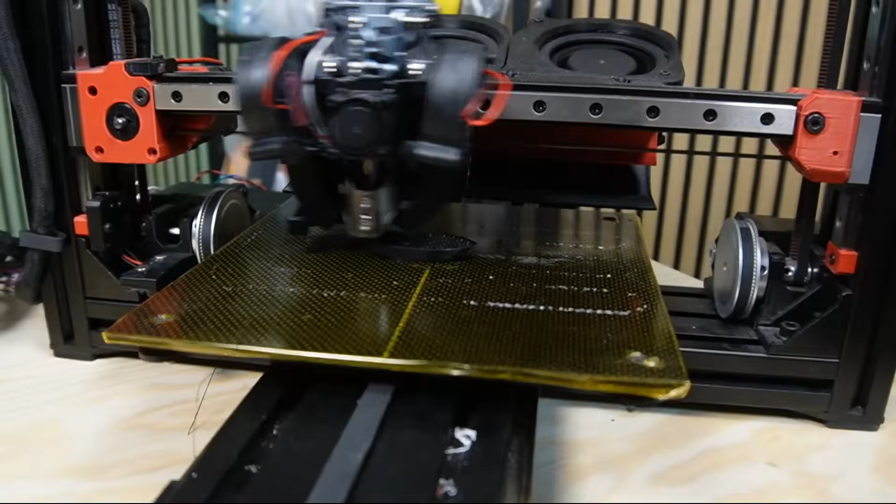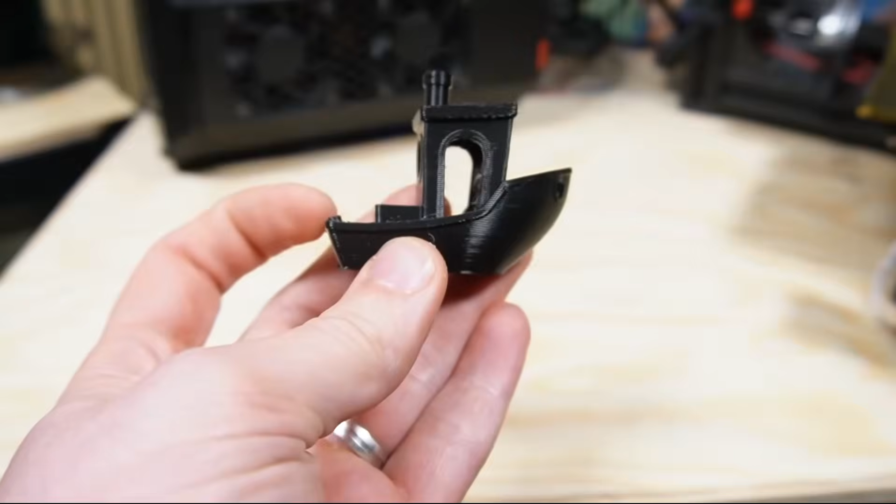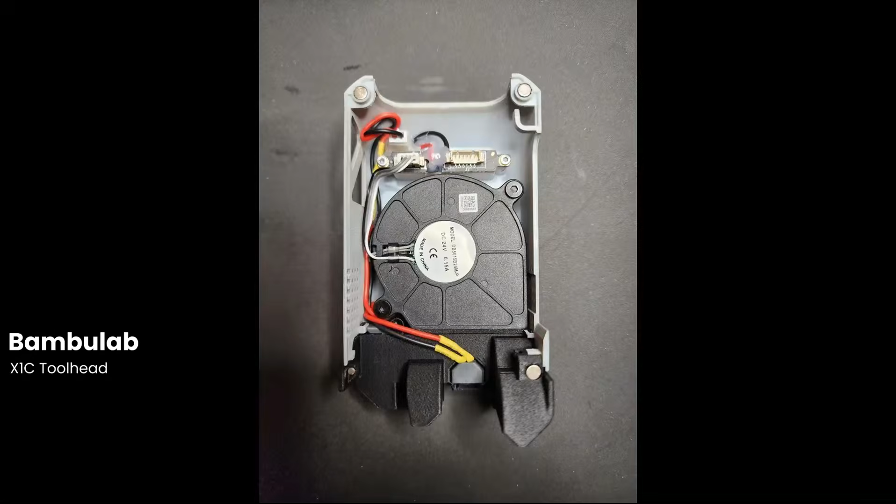A tiny component, just a few centimeters wide. At first glance, it looks completely unremarkable, and yet it decides whether your print succeeds or ends up as a useless blob of plastic. It sounds mundane. It's not.

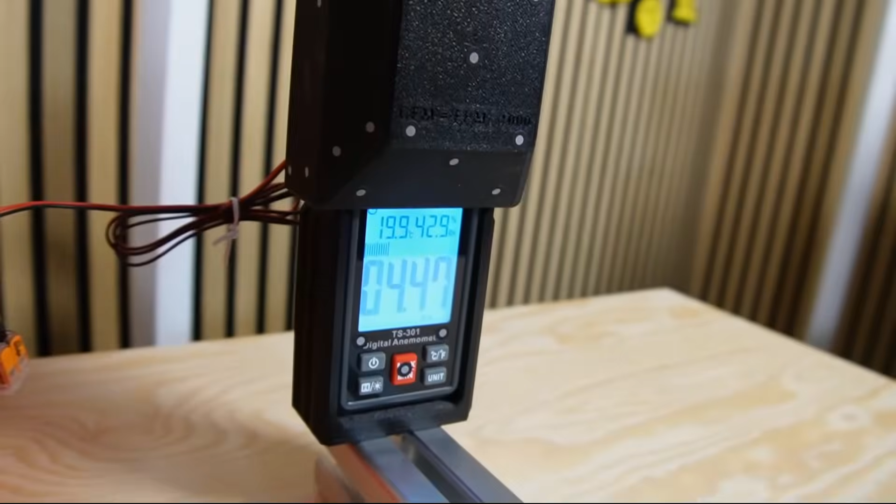We're talking about your part cooling, especially the 5015 radial fan. It's the part sitting on nearly every modern printhead, ensuring the layer you just laid down solidifies fast enough. Between the strongest and the weakest fan we have here on the table, there is a factor of 4 in performance. If we pick the wrong one, we will end up searching for the root of the problem everywhere in the printer except where it actually is.

That's why we ordered 16 5015 fans, built a test bench, and measured everything properly: air velocity, RPM, power consumption, and noise levels. Tested in a free channel and under realistic backpressure, just like a real printhead.

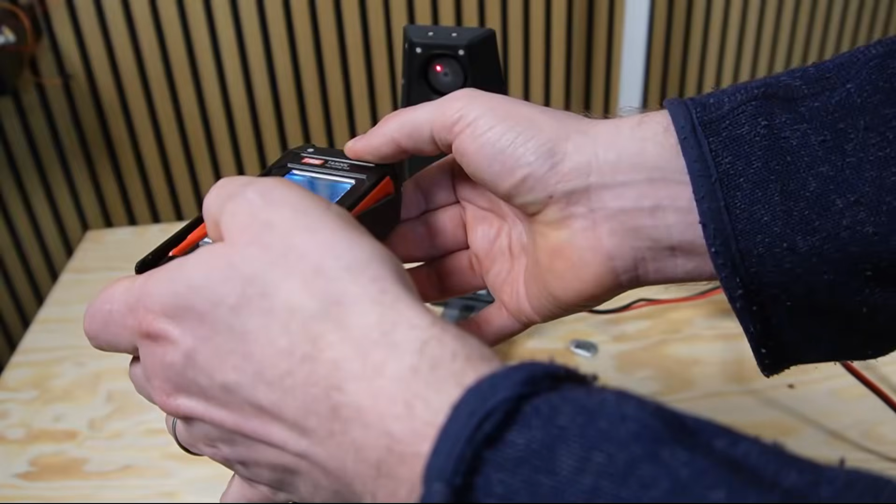Whether you're a speed printer trying to shave off seconds or you're just starting to dive into your printer's hardware, this test gives you data instead of gut feelings. And by the way, the biggest surprise wasn't the most expensive fan in the field, it was one we bought from China for under €5.

If you drop by the channel often, you know we have an LH Stinger. For those who aren't familiar, it's a DIY printer based on an Ender 3 but rigorously trimmed for speed. Carbon bed, stiff frame, dual Y motors. We introduced it in detail nearly 2 years ago. If you want to know more about the build, the link is in the video description.

Mechanically, the printer can handle more than 1000 millimeters per second with extreme acceleration. We aren't fully utilizing that yet because other factors limit us first. And exactly one of those factors is today's topic: the cooling.

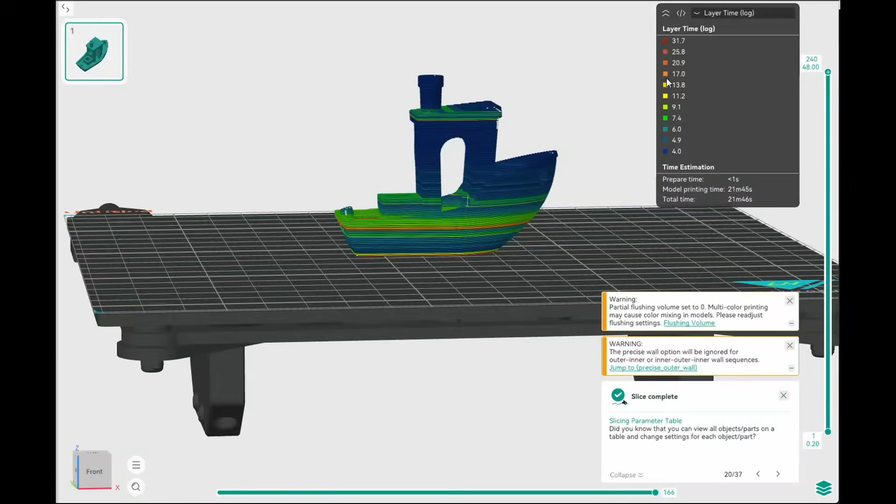The faster we print, the less time each layer has to cool down. The solution is obvious: more air on the part. And for years, the standard for that has been the 5015 radial fan. Theoretically, they are all the same dimensions, same mounting holes, but in practice they are worlds apart.

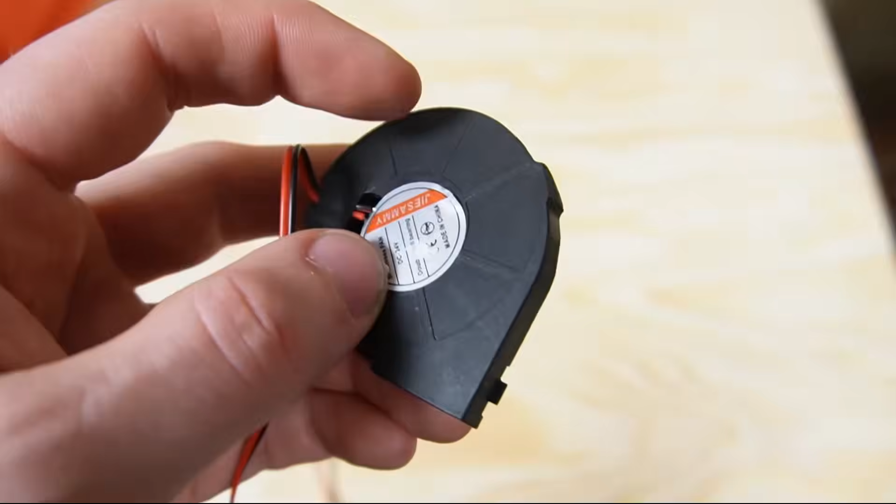We have models here that look identical on the outside, yet one blows 6 times as much air as the other. We finally wanted to measure which one is the best, but before we dive into the numbers, let's look at our candidates. We tried to get everything on the table that the community is currently using, from classics like the Sunon to RPM monsters like the Devil Design Typhoon or Honey Badger, all the way down to AliExpress finds we knew nothing about.

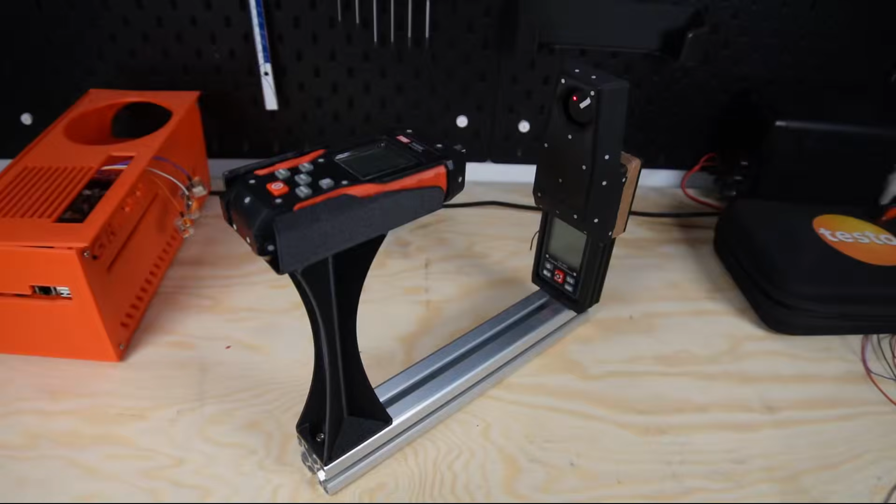One fan is running outside the competition, the Cartographer 3D Cyclone. It hits 22,000 RPM according to the datasheet, which we verified. Why isn't it in the ranking? First, it doesn't fit our test bench. Second, it has a metal fan wheel. If that thing flies out of the housing at 22,000 RPM, it's just too dangerous.

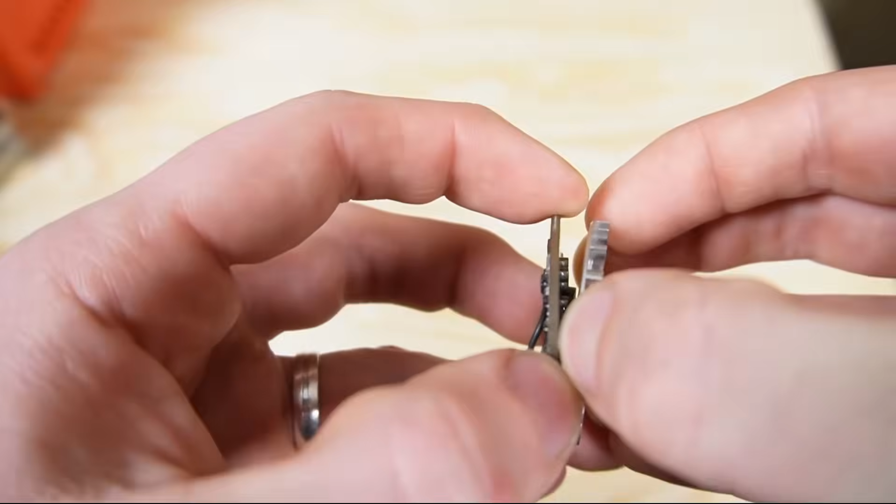We also want to highlight another fan because it becomes important later: the Jiesammy. We found it on AliExpress and ordered it on a whim. No proper datasheet, no RPM value. On the seller's page, it wasn't even correctly labeled. We truly expected this thing to land somewhere in the back of the midfield.

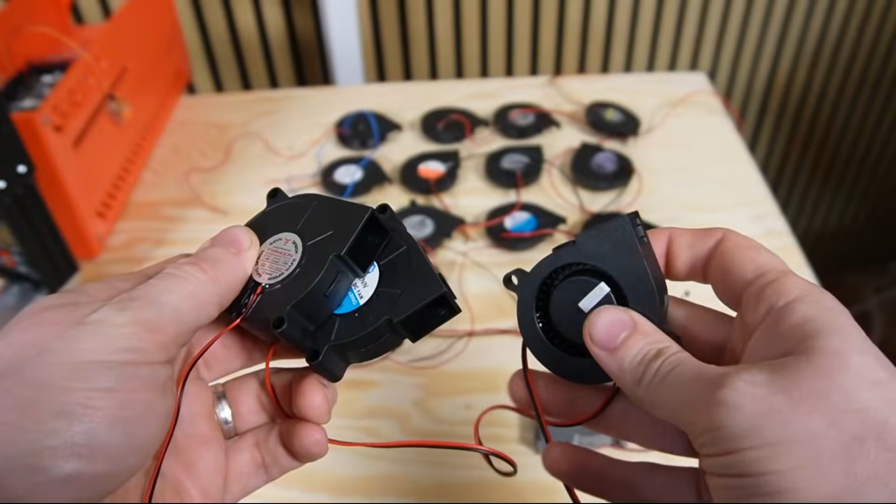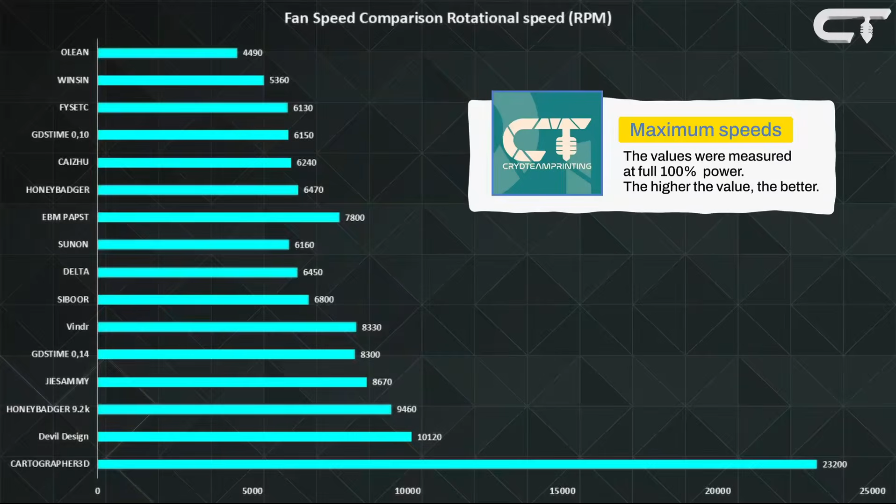Before we jump into the measurements, here are the raw numbers from the table. RPM: the span ranges from around 4,500 on the Olean to over 10,000 on the Devil Design Typhoon and 9,200 on the Honey Badger 9.2K. The Jiesammy hits 8,300, significantly higher than its fake datasheet suggested.

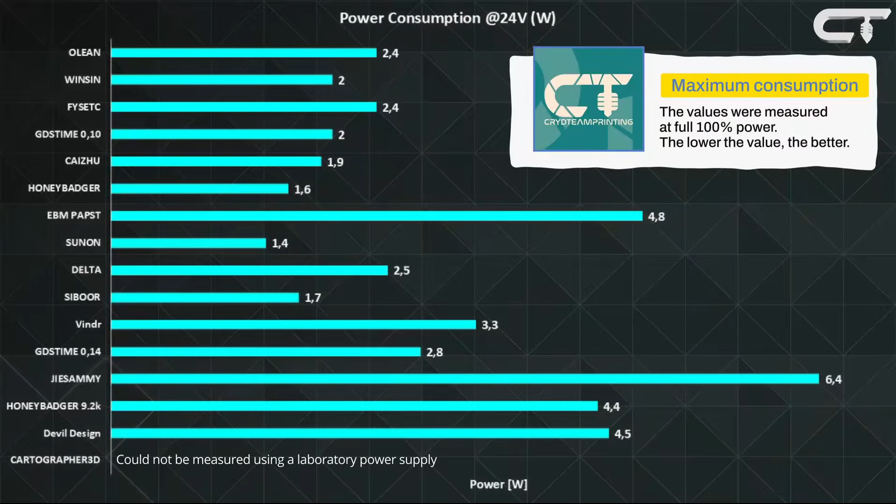Power consumption: the field ranges from 1.4 watts from the Sunon to over 5 watts from the EBM Papst and Jiesammy. That's a factor of 3 in power. Speaking about price, the Olean for under €2, Jiesammy for under 5, Sunon in the double digits, and the EBM Papst for nearly €60 — that's a factor of 30. We will link the full table, including noise, RPM, and air velocity for every PWM step, in the description.

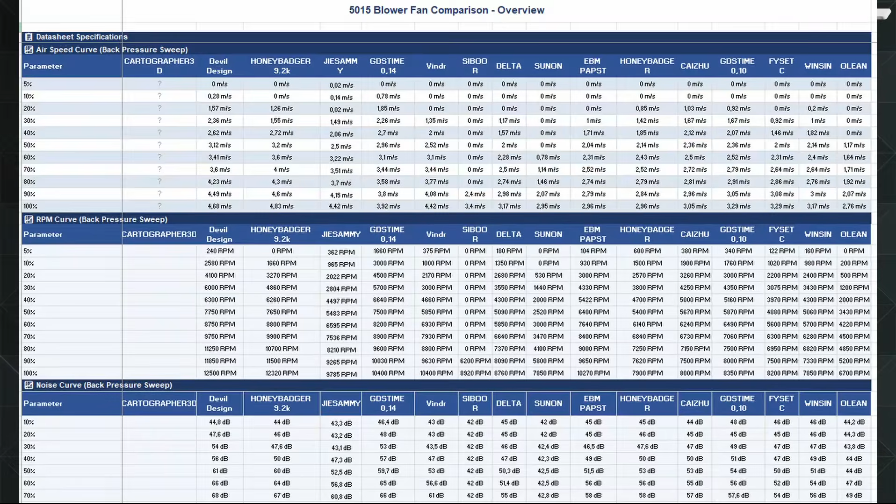Let's pull 2 specific values from this table. The efficiency, which means milliwatts per meter per second — essentially how much energy a fan needs for a fixed value — at 5,000 RPM, the Sunon wins this by far. We can't officially validate it, but we suspect the Maglev design is responsible for that. Devil Design and Honey Badger have doubled the consumption per airflow, but they blow significantly more air. For us, that's a fair trade.

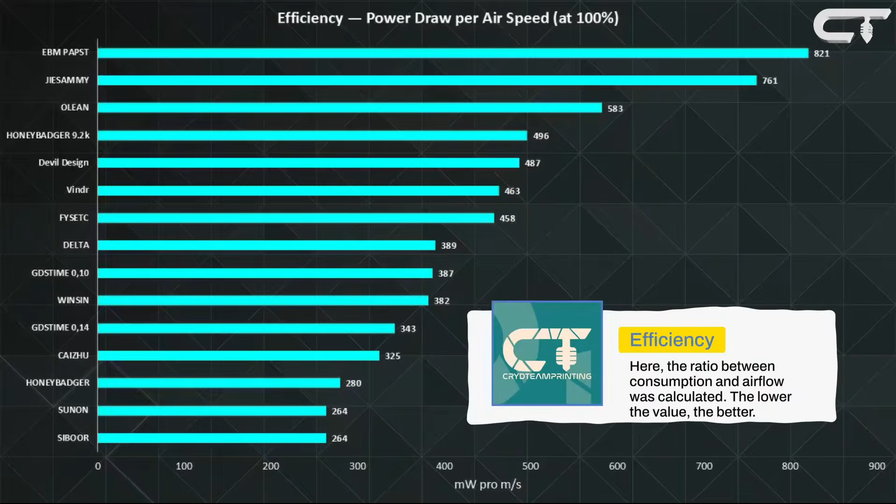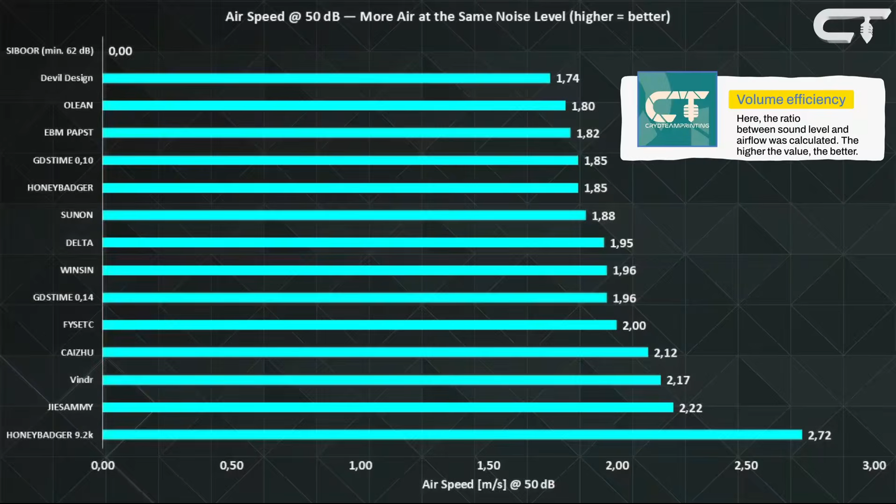Second, the airflow at fixed noise. We choose 50 decibels, roughly room volume. The Honey Badger 9.2K is in front, behind it Jiesammy and Xunon. At the very back, and this is a shocker, the Devil Design Typhoon. Aside from the Cyclone, it's the most powerful fan in the field, but even at half speed, it's significantly louder than all of the others.

One question that will definitely show up in the comments: why are we measuring air velocity and not volume flow in CFM? To measure proper volume flow, we would need a calibrated wind tunnel, and the costs for that quickly reach four figures. The same goes for static pressure — measuring that probably requires equipment that simply isn't in our budget. Is that a problem? For an absolute statement on pressure, perhaps. For a comparison between fans, absolutely not.

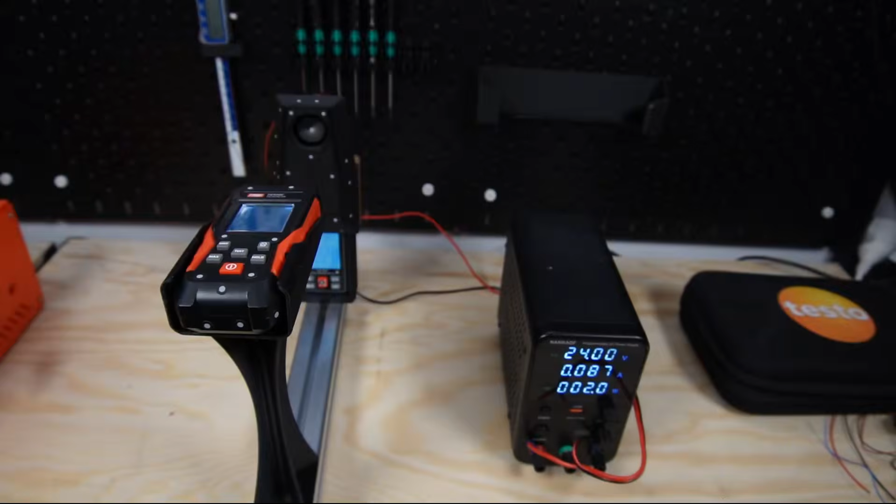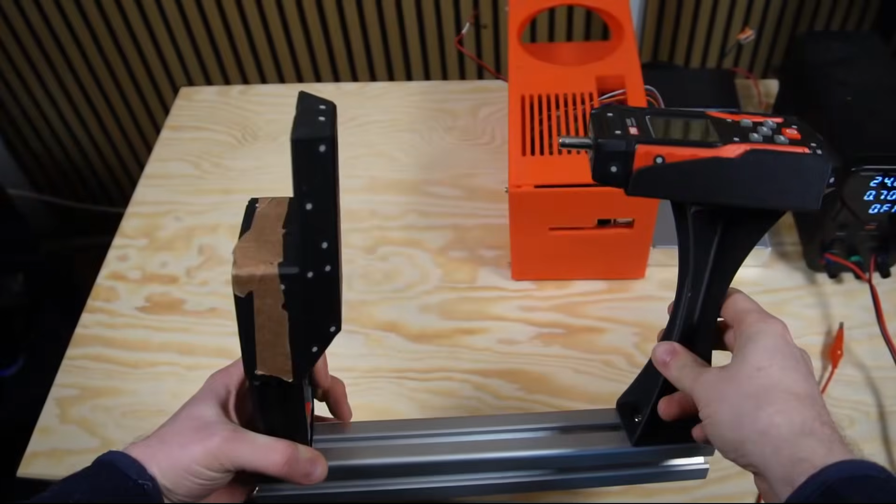We measured every fan 3 times: in a free housing, in an air duct, and under back pressure. If a fan is strong in free flow but collapses under back pressure, it has low static pressure. We tested with a 24-volt power supply, a BTT Manta board for control, a lab power supply for voltage monitoring, a laser tachometer for RPM, and a Testo hot wire and vane anemometer for airflow.

Test 1 with free housing. The first setup is the simplest: turn the fan on and hold the sensor directly in front of the outlet.

Quick note on the data: the absolute air velocity fluctuates. Move the sensor slightly and the numbers change directly. That's why we choose a relative comparison. We use the Sunon as our 100% reference, because it's installed in so many printers. All other fans are scaled against it.

Top of the field, the Devil Design Typhoon at 174% of the Sunon. Following close is the Honey Badger, Jiesammy, and GDSTIME and Vindr Berserker. The surprise: the EBM Papst, the most expensive fan in the field, barely lands above the Sunon.

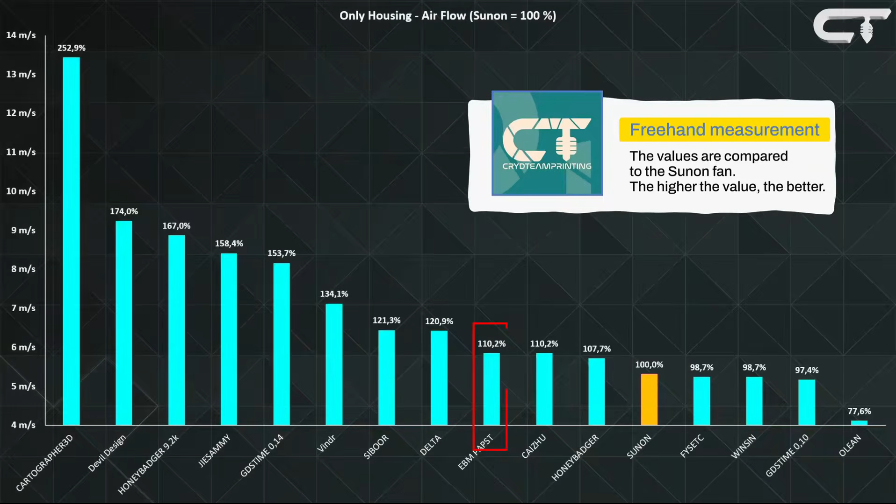To be fair, the EBM Papst has a wide mouth design, like a larger outlet. For this test, we mounted the motor in a standard small mouth housing because it wouldn't fit anywhere else otherwise. We changed the geometry, and that likely explains the poor result.

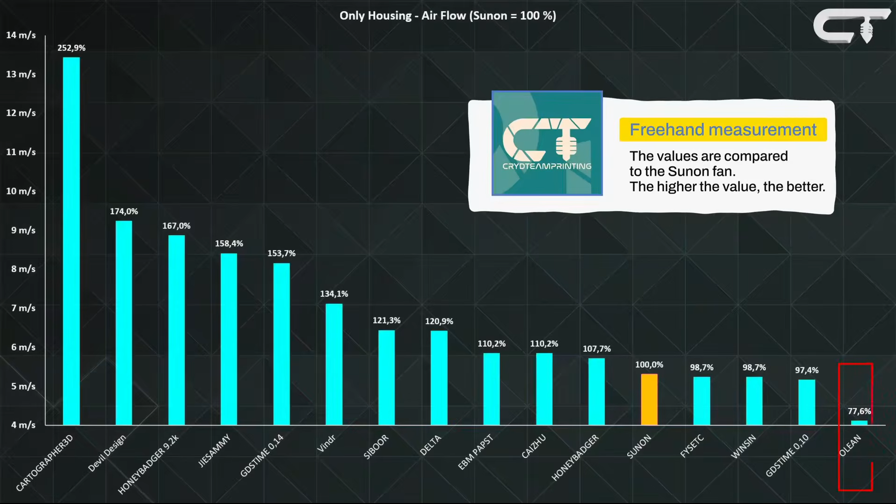At the very bottom, the Olean. In the diagram it's a line you can barely see, factually unmeasurable. And that is the point. Between the top and the bottom of this field, there is a factor of 4 for the same component with the same dimensions. But, and these are the critical limitations, a fan in a free housing is doing something it will never actually do in practice.

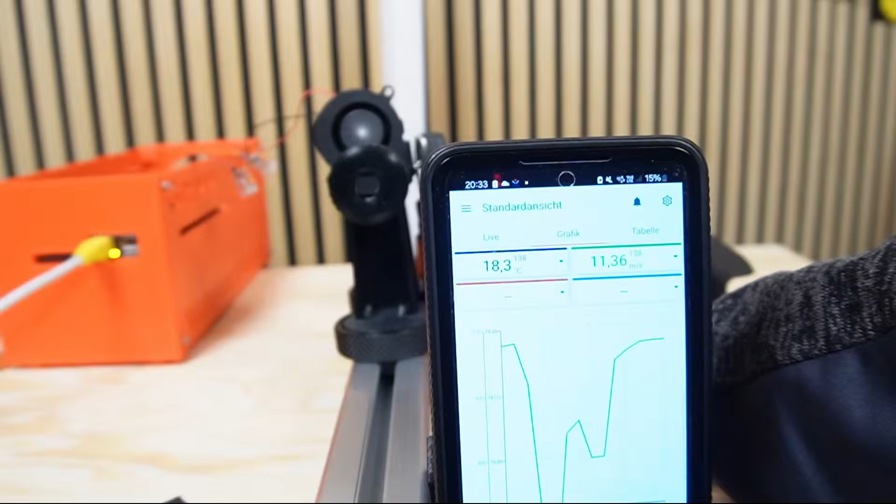In a real printhead there's always a duct attached to the front. The second point is the measurement itself. In an open housing the air spreads out in a cone shape. This means the vane anemometer never captures the full stream, it only ever sees a small cross-section. A tiny shift in sensor position leads to a different value.

This means we should take the absolute numbers from this specific test with a grain of salt. However, the general trends across the field are definitely accurate. But to get a truly clean measurement, we need our next setup.

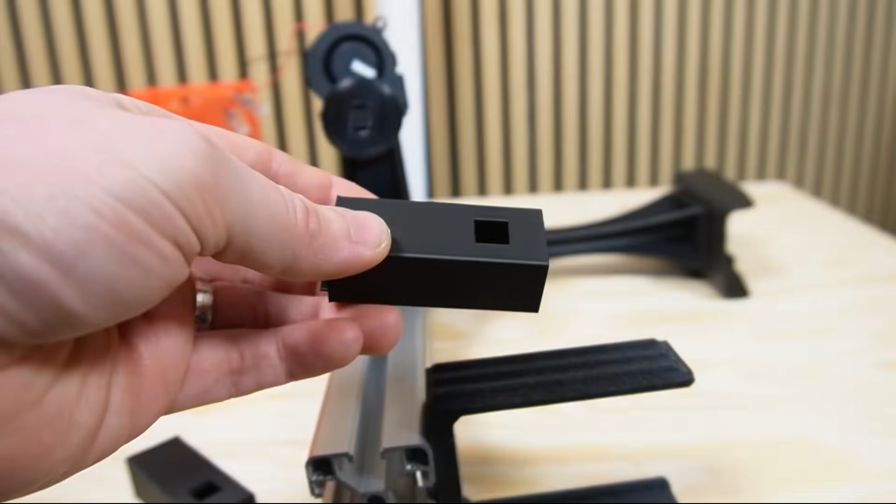Test number 2, with an air duct. The second setup uses a defined measurement channel. The duct is attached to the fan and the sensor is held at a fixed position inside. This reduces measurement error and increases practicality due to higher air resistance.

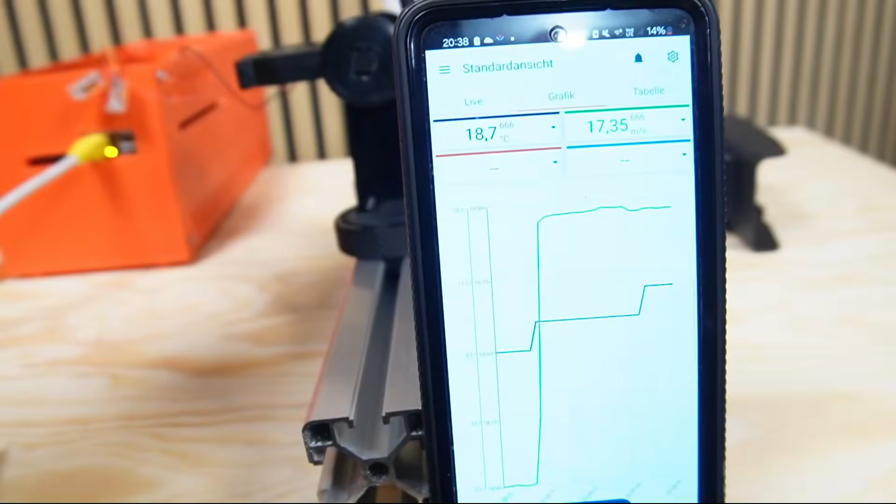The leader is the Devil Design Typhoon at 154%. Second is the Honey Badger 9.2K at 147%. And third, the Jiesammy at 130%. Behind them, things get mixed.

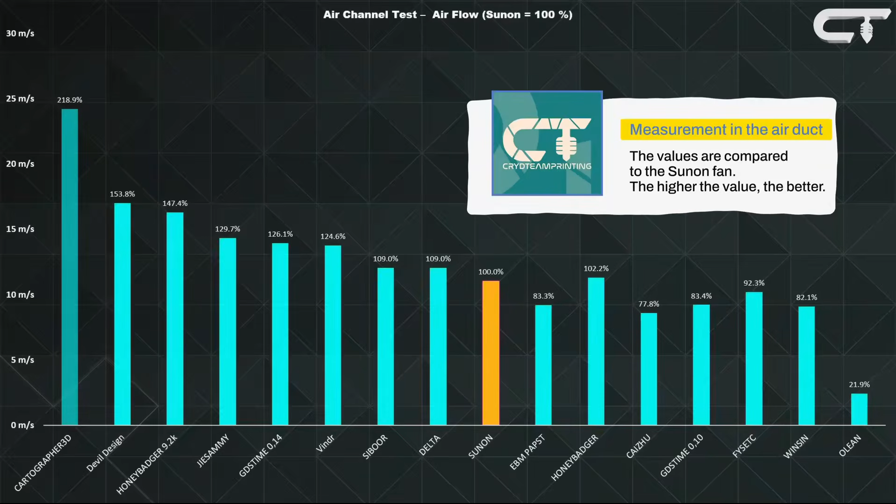GDSTIME and Vindr Berserker are at 126% and 125%. SIBOOR and Delta are tied at 109%. You can see the rest of the field, especially those below 100%, in the graphic.

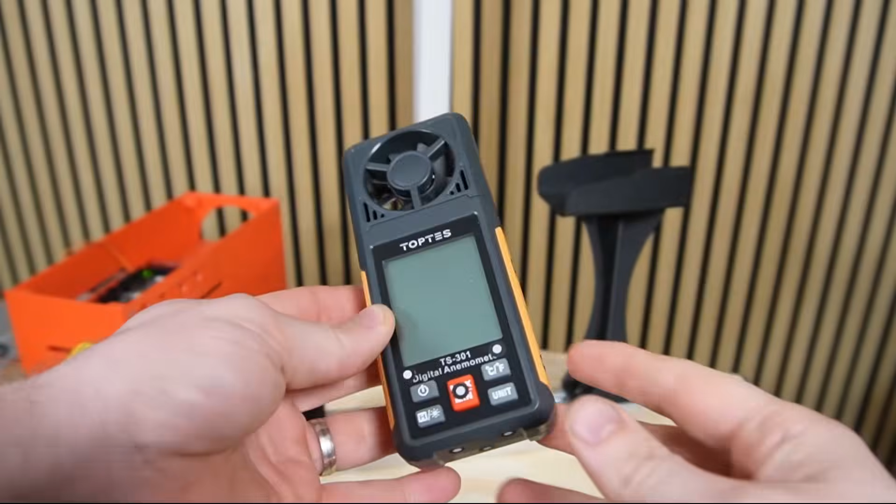Test 3, backpressure. Now here's the catch. In a real printhead a fan doesn't blow freely, it blows into a narrow channel with bends and nozzles. So we built a backpressure bench modeled after the Stealthburner printhead.

At the top, Devil Design and Honey Badger swap places. The Honey Badger now leads at 164%, just ahead of Devil Design at 159%. Joint third place, Jiesammy and Vindr Berserker at 150%. The AliExpress fan proves itself even in a more realistic scenario.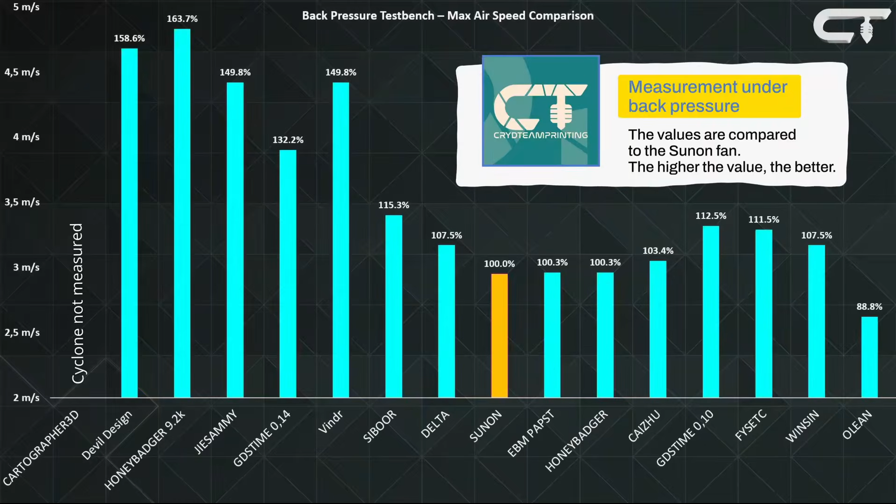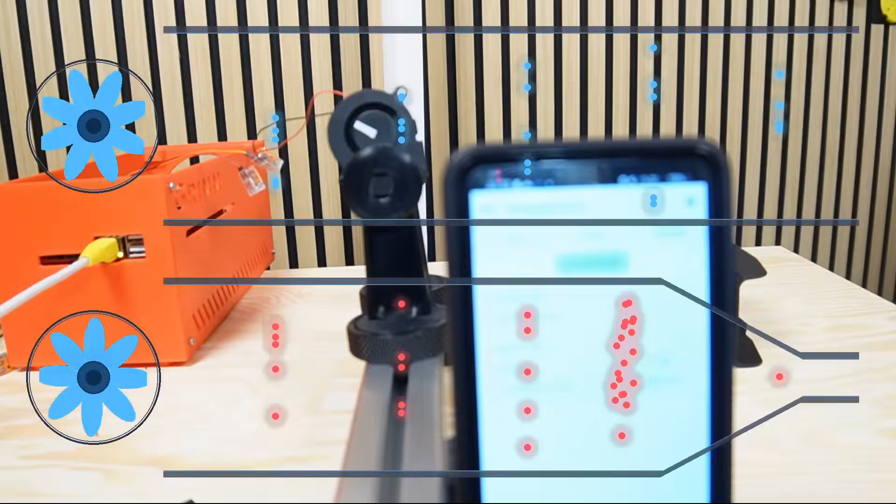We noticed something interesting here: the measured RPMs were higher than the datasheet values for every single fan. The reason lies in the physics. When a radial fan works against a narrow channel, it can't move air fast enough, it backs up at the outlet. The rotor faces less load and therefore spins faster at the same voltage.

Beside raw power, we check 2 values that are vital for daily printing. Number 1, at what PWM signal does the fan actually start? Number 2, how stable does it hold its RPM at a fixed value? For startup behavior the range is huge. The GDSTIME starts at just 1%, the Sunon needs around 15%, and the SIBOOR an atrocious 80%.

Below that, the fan simply doesn't spin. Proper regulation with that fan is impossible.

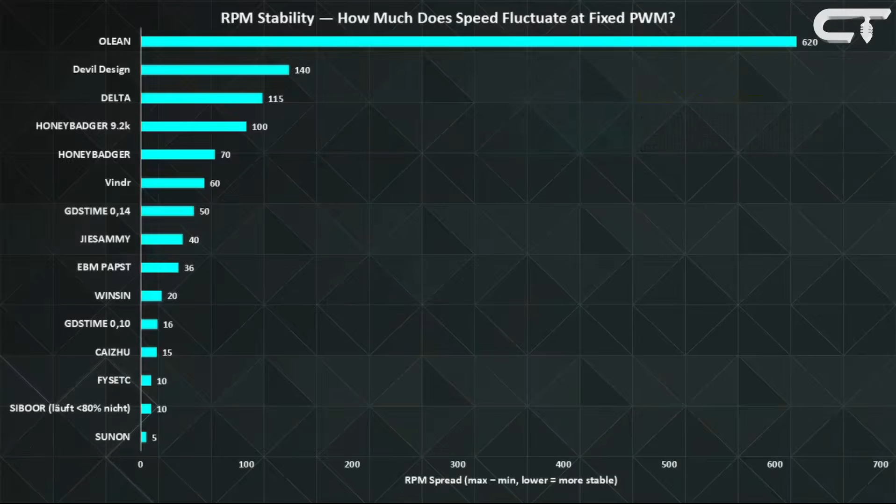Then stability. Ideally, if we set it to 50%, it should hold that RPM. Most fans do this. However, with the Olean and the Devil Design, the RPM fluctuates visibly even with a constant signal. For the cheap no-names it's not surprising, but for the Devil Design it really is. It's tuned for max power, but under partial load the regulation is inaccurate. For speed prints where the fan runs at 100%, it doesn't really matter, but for anything else it's a real disadvantage.

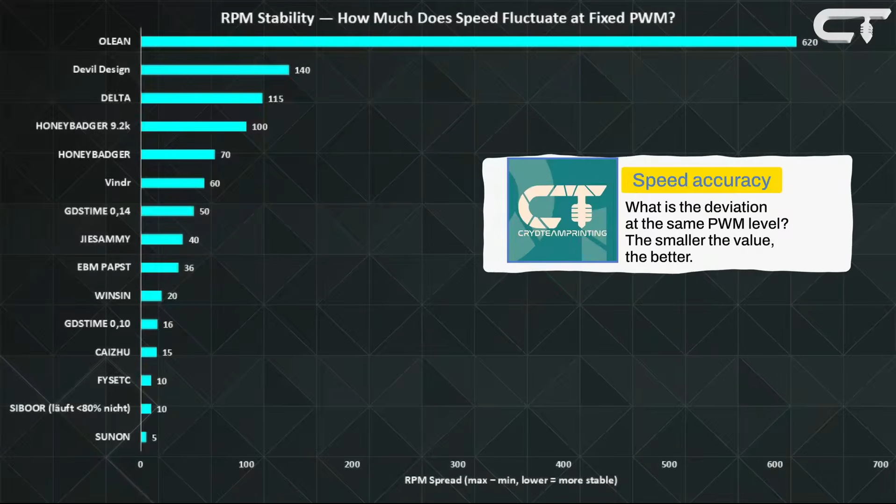Our takeaways: there are 3 things we see differently after this test. First, the performance differences are absurd. Between the best and the worst in a duct, there is a factor of 4. If you pick the wrong one, you are leaving massive print quality on the table and searching for the error somewhere else in the system.

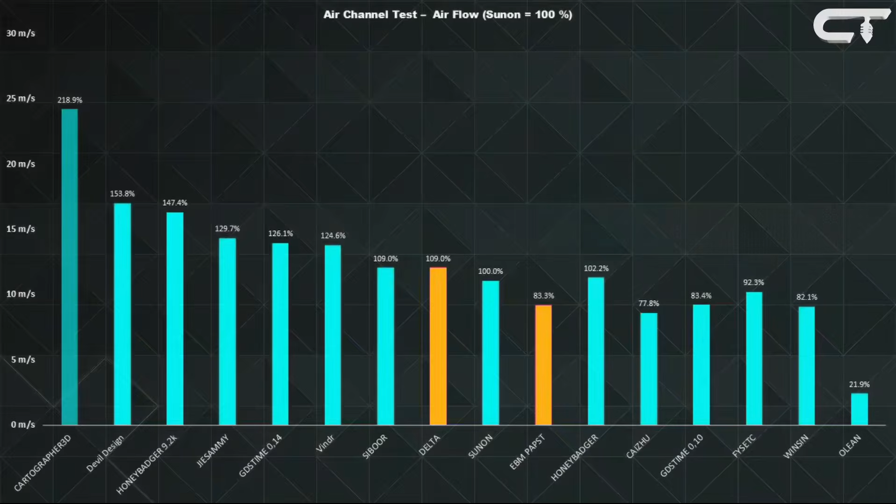Second, there is no single best fan. You want raw power, Devil Design and Honey Badger. Want to save power, the Sunon. Want it quiet, get the Delta. Third, a brand name doesn't protect you from mediocrity.

The EBM Papst is the clearest example: an excellent reputation and the highest price, but in the duct it was beaten by the 3 times cheaper Sunon. Even the Delta, known as the 4010 reference, is only midfield here.

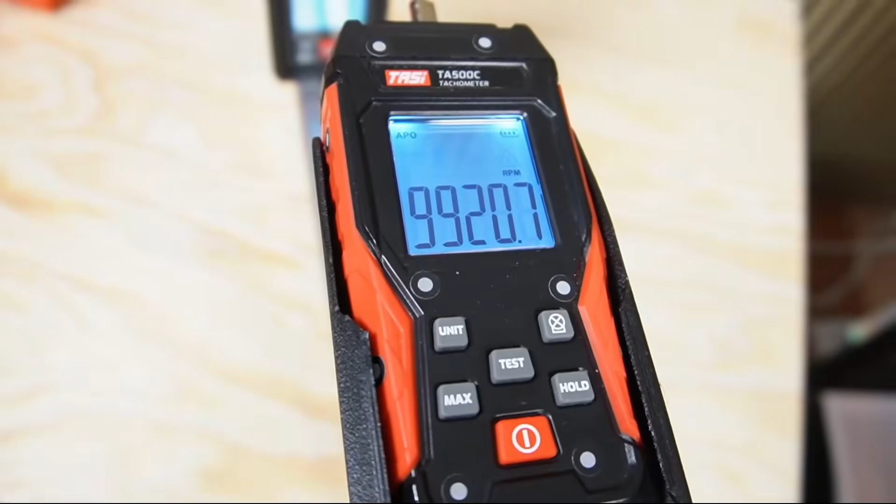Our specific recommendations: for maximum performance, choose the Devil Design Typhoon or Honey Badger. The price performance tip is the GDSTIME, though we can't guarantee you'll always get the same fan due to the labeling. We would avoid the Olean, current SIBOOR models, and the EBM Papst for this specific use case. And frankly, the Delta lost its crown in this test as well.

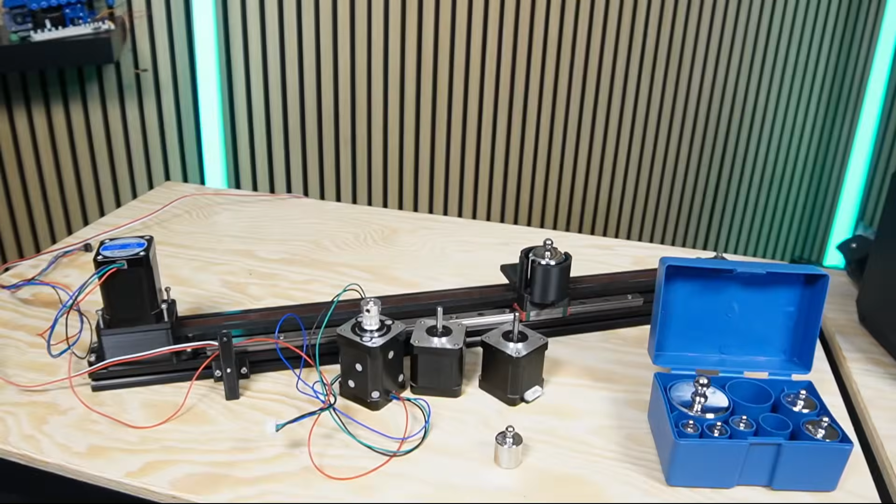The fan is only one piece of the puzzle. In the next video we will look at the optimal motor. The candidates are ordered and the test bench is built. After that, hotends, filaments, and slicer profiles.